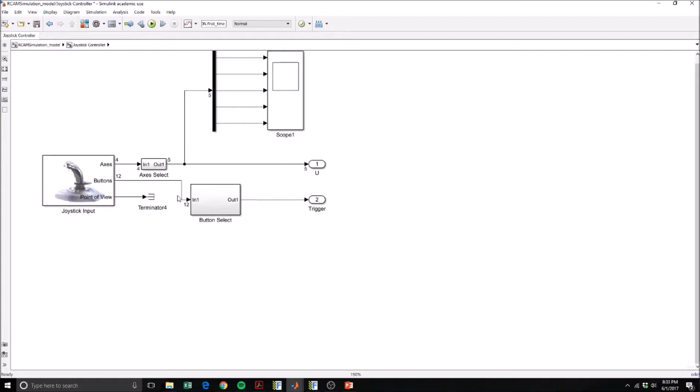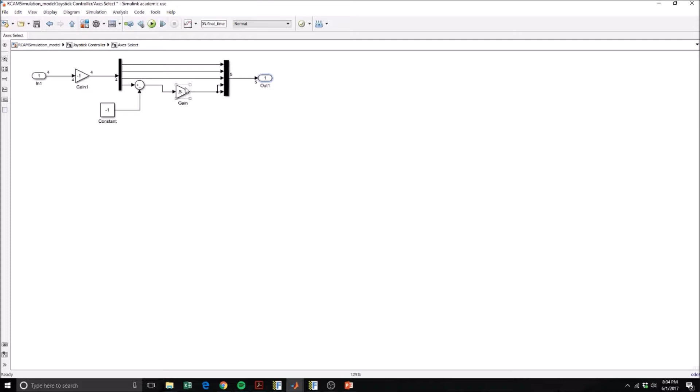So, into the trigger, I have the joystick input from Simulink, and then I'm selecting the axes. I am inverting them, and then to balance the throttles to go to 0 to 1 instead of -1 to 1, I am adding a -1 or subtracting a -1 and gaining it by half. And then this is just a terminator of all the other buttons except for the trigger.

The switch, like I said before, activates manual controls when the trigger is depressed and switches to autopilot when the trigger is released. I have scopes for my controls and for my states. The RCAM system is just a normal RCAM system with the navigation position north, east, and down added in. So it runs my old RCAM model and then uses a rotation matrix to get to position north, east, down.

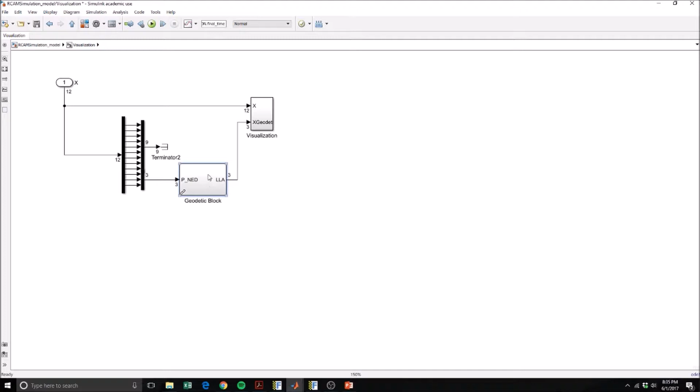For the visualization, I grab the last three states, the position north, east, down, and put it into my geodetic block. The geodetic block takes those position north, east, down and puts them into the flat earth to LLA Simulink block with a height reference of -2000, so that way we are flying in the air instead of underneath the sea. It then goes into the visualization block that was given to us.

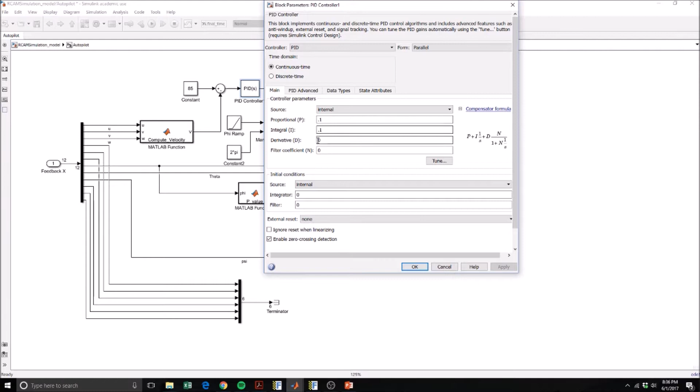Lastly is the autopilot. The autopilot has 4 PID controllers. U, V, and W go into compute the velocity. The velocity is set to 85 and uses a PID controller which has low proportional integral. From this PID controller, it then goes into saturation of 0 to 1 because the throttle can only go from 0 to 1. And that's controlling both throttles simultaneously.

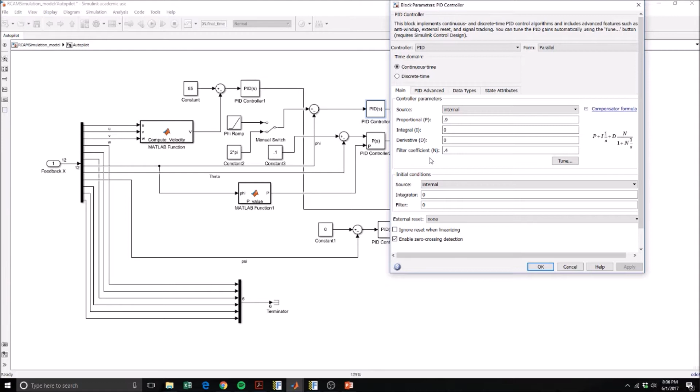P, Q, and R are being terminated, as are position north, east, and down. Phi is going into a PID controller where it is set to a constant of 2 pi, so it'll roll to 2 pi. The PID controller has a pretty high proportional gain and 0 integral, 0 derivative. Both the integral and derivative were causing the system to become unstable, so it's basically just a P controller. Gains are inverse on all the controls. It is saturated, so it can only go from -1 to 1.

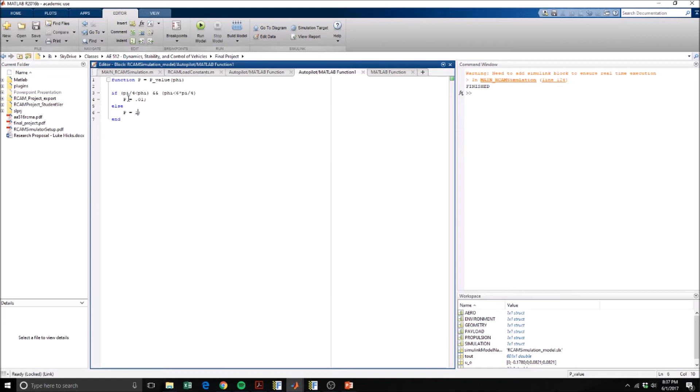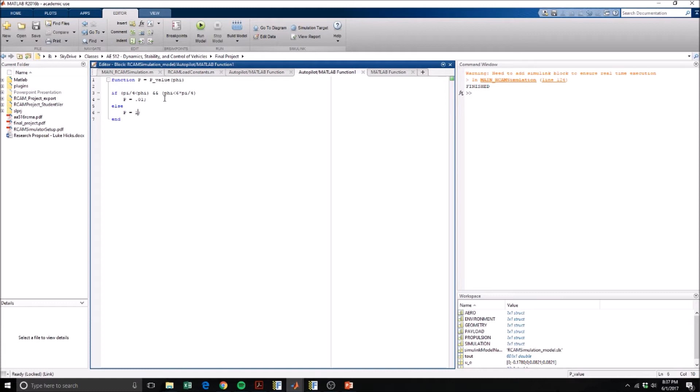Next is theta, which is at a constant of 0.1, so it has a slightly upward pitch. It is just a proportional controller where the proportional gain is external. The proportional gain is from a MATLAB function where I'm taking in phi, and then if phi is between pi by 4 and 6 pi by 4, so basically if it's inverted, the proportional gain is very low because I found at this inverted state the PID controller controlling the tail elevator was throwing everything off and making it uncontrollable. And then I switch it back to 1 so that way it'll level out once it's outside its inverted state. The elevator is saturated to go from -1 to 1.

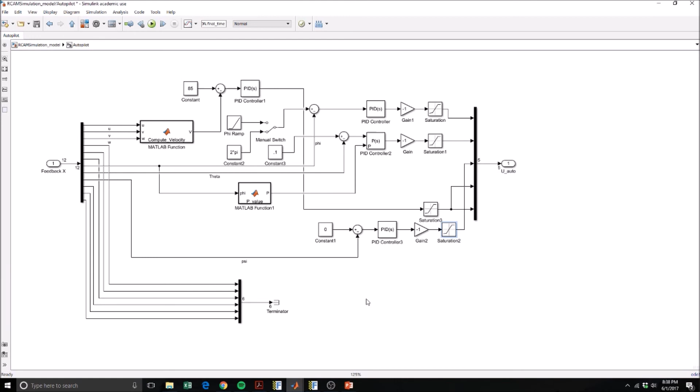Next I have psi, which is set to 0. It's just another very low proportional controller just to give us a little bit of extra control on the rudder, saturated from -1 to 1. So with this, I can fly manually holding the trigger, I can release the trigger and autopilot will take over, and then it will level out once it's reached 2 pi.

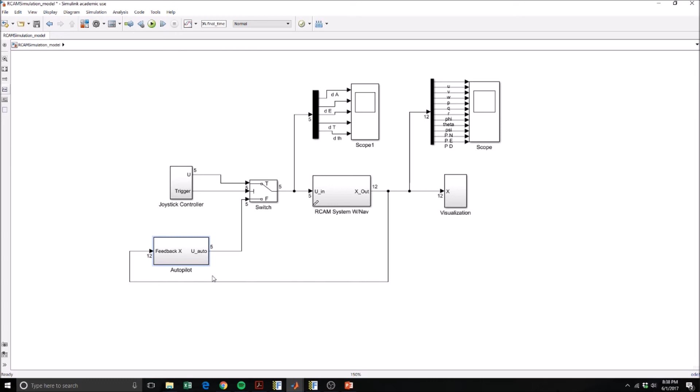Let's take a look at that. We are starting the controller and I have control. The trigger is depressed. You can see that I'm flying the plane. I then let go of the controls, it performs an axial roll, and now it will level out. I can then regain the controls by pulling the trigger and letting go and it'll level out.